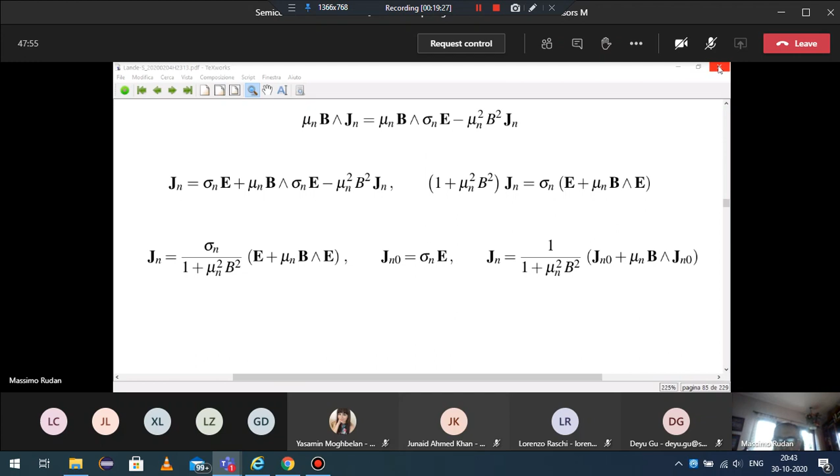Okay, and this one is connected to the other one that I was trying to show you before. So I just destroy completely this. Let me see whether I can put the other one over the screen. No way. It's nothing to do with. I don't know what happens. I'm going to destroy all the other.

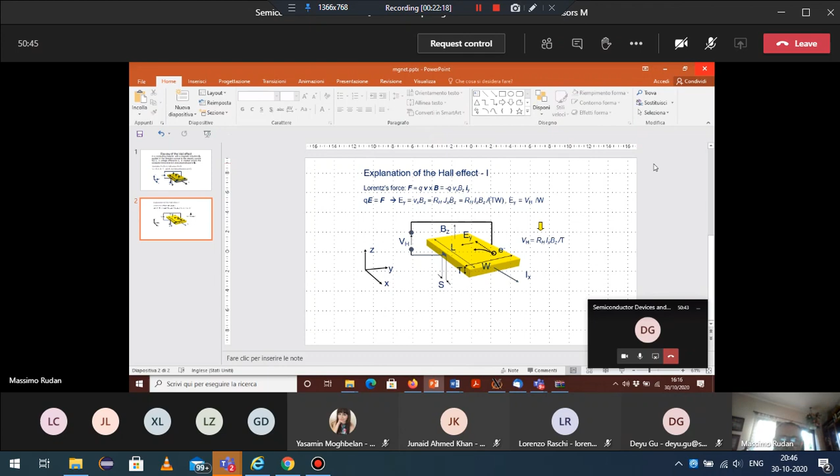Can some of you operate the mic and tell me what you see on the screen, please? Because I'm not able to. Hello? Can you see the slide? Yes or no? Yes, we can see. Oh, you see. Okay, good. Sorry, because there was some confusion in the system. Okay, so now I'm trying to change the slide, taking another file. Okay, so now.

Okay, you should be able to see a calculation that is similar to the calculation that I just completed a few minutes ago, just the same thing. This slide is still related to the Hall effect. So the Hall effect was examined yesterday, but I come back to it for a second because I just wanted to remind you that when we use the magnetic field as a method to measure properties using the Hall effect, the device must be elongated.

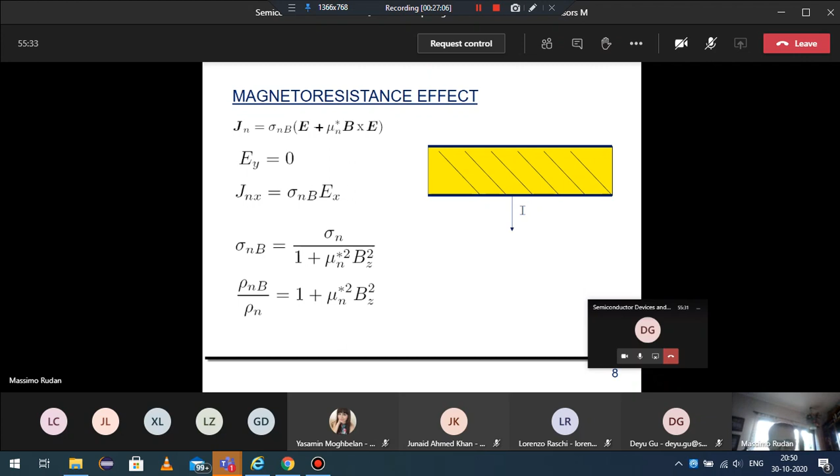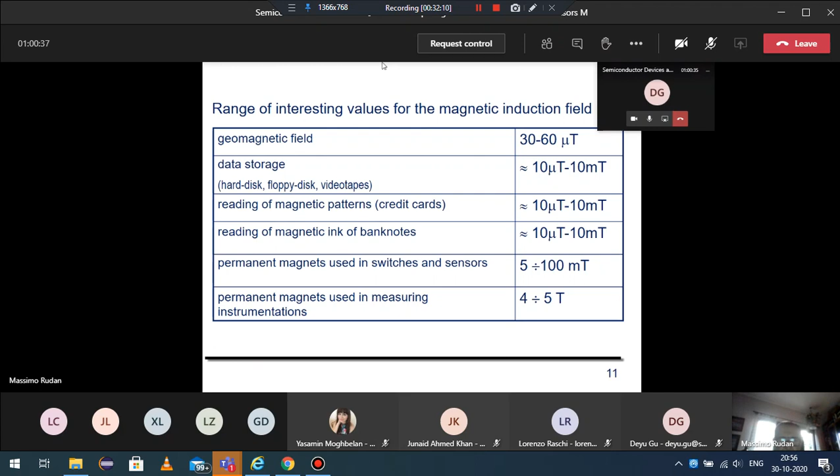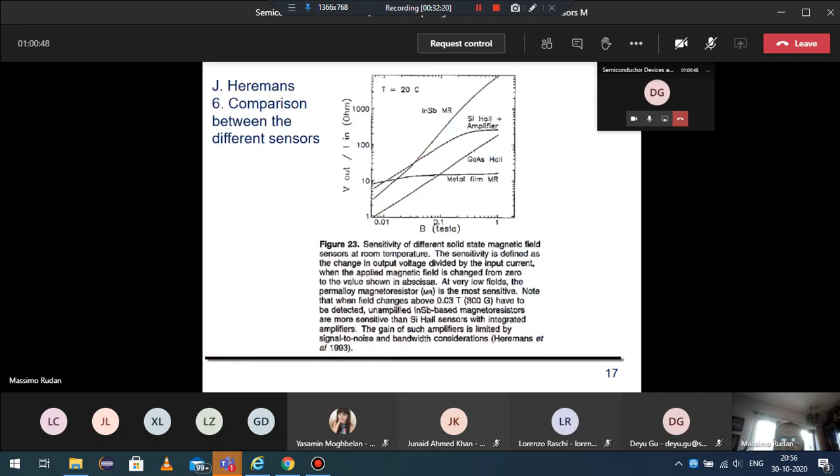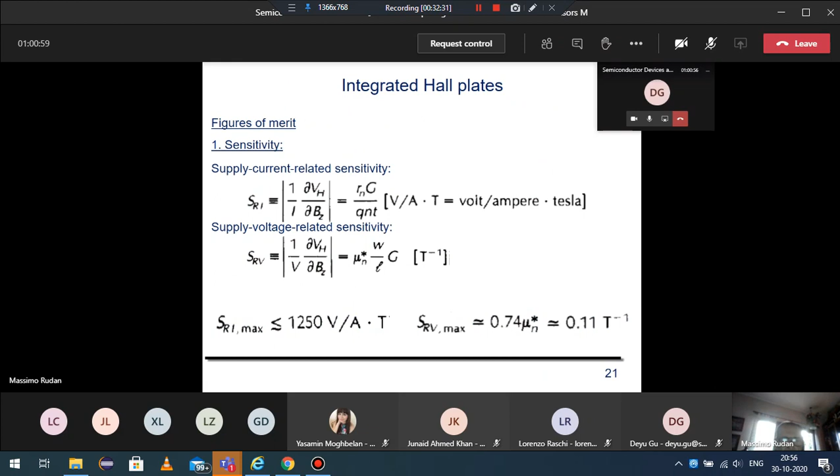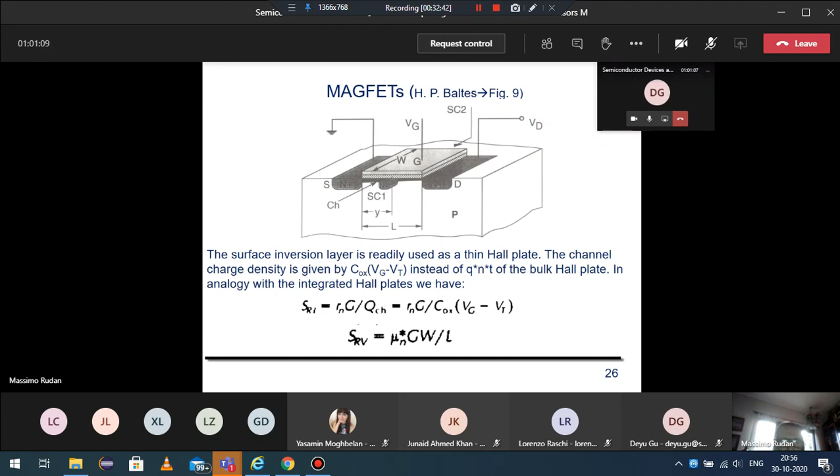Okay, we are now going into too many details. These are typical forms of devices that are used for detection of magnetic fields. I will upload much of this material, so if any of you is interested, you can have a look at it. But I think that this is it for the magnetic sensors.

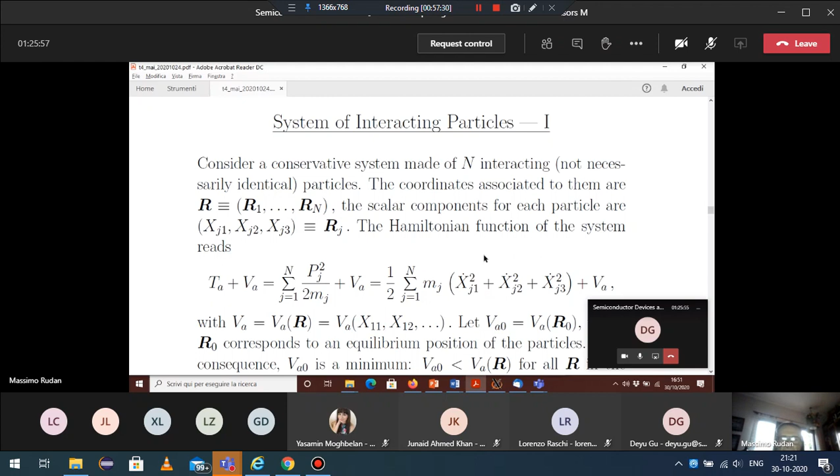You remember that in mechanics, for a system of particles, we define the equilibrium positions as the positions that make the potential energy minimum. So in principle, we should take the potential energy that depends on all coordinates and calculate the coordinates such that Va is at a minimum. It is enough for us to know that this minimum does exist.

So the set of coordinates such that the potential energy has a minimum is called R0. R0 is the equilibrium point of the system. This does not mean that the particles sit in the equilibrium point. Okay, they vibrate around it. And we also call the value of the potential energy corresponding to the minimum VA0. Okay.

Now, as I said before, the displacement of the particles with respect to the minimum is small. And this is very helpful because we can think of expanding the potential energy of the whole system in a Taylor series around the minimum. And then we truncate the expansion to second order. Okay.

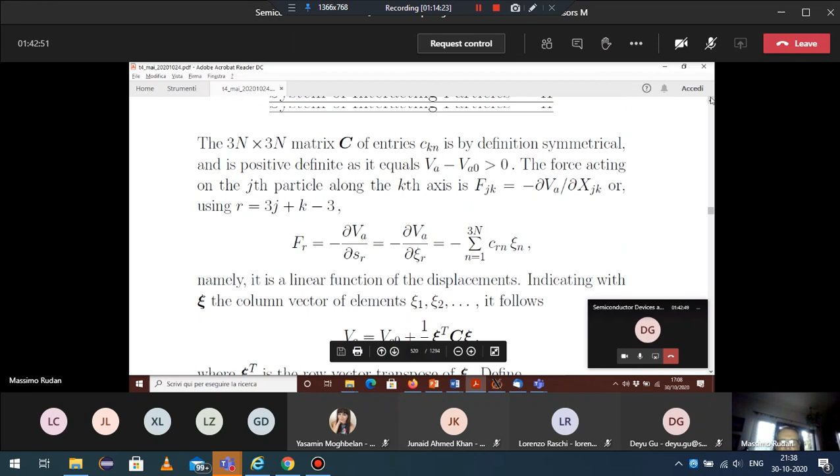To do so, it is better to introduce a matrix and vector notation. So we call this one, with symbol capital C, the elastic matrix, okay? So this is a gigantic matrix of order 3n by 3n.

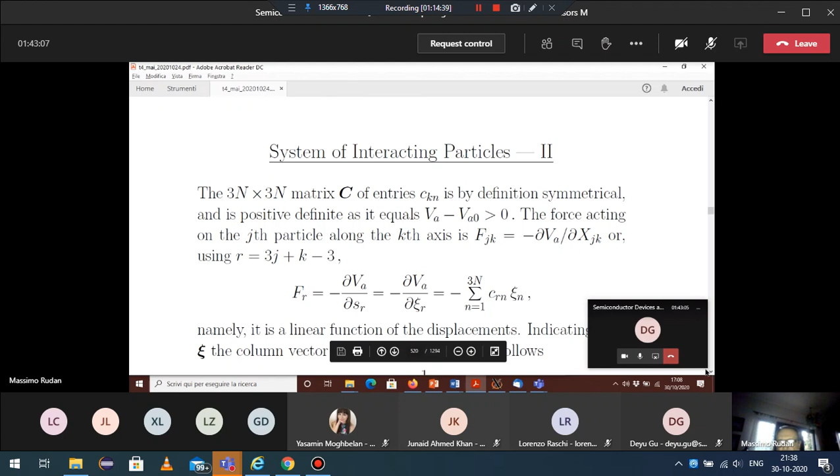And then we also introduce a column vector whose elements are the displacements, okay? So if we want to express the potential energy after the expansion to the second order in vector form, we may do this. We may write the second order expansion as the vector of the displacement that is pre-multiplied by the matrix. So C times xi is again a column vector, okay? And then we multiply by the transpose of xi, okay? If you do that, you find exactly the second order expression, the quadratic expression that we had before.

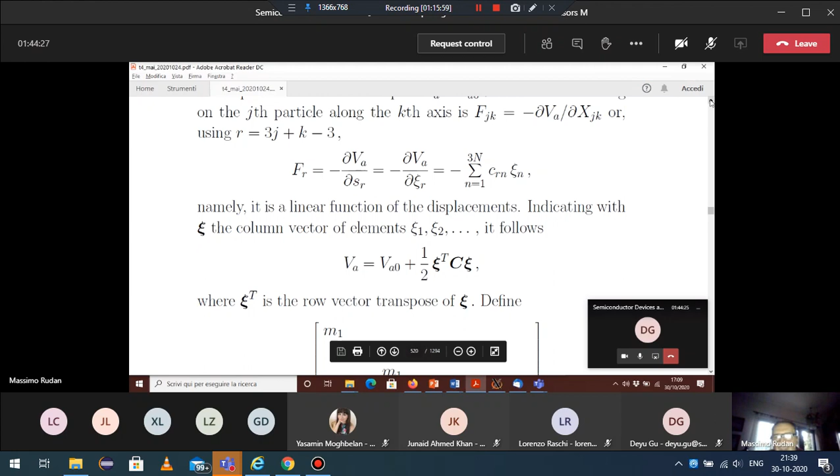Now what we want to do to continue is to express also the kinetic part of the energy in vector form. This is relatively easy because you see in the kinetic part, we have an expression that is already separated, and we have the masses as coefficients. So what we can do is, first of all, in a conservative problem and in Cartesian coordinates, capital P, that is the momentum of the particle, is equal to the mass times the velocity. So the kinetic energy can be written as, you see in the next of this formula here, P becomes m times the velocity. So we have the mass squared divided by the mass, that gives you this, times the square of the velocity, and the velocity of the individual particle is just the sum of the derivatives with respect to time of the three components squared.

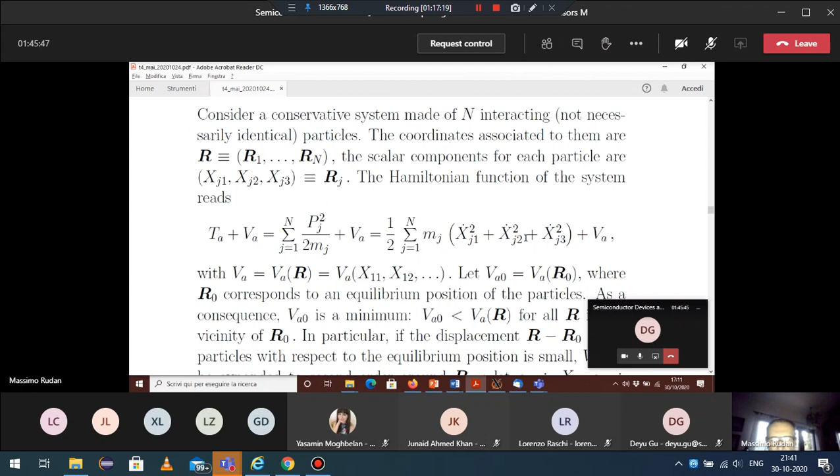Okay, so this expression can immediately be set up in matrix form. Of course, we have to introduce the new components that we call xi. Okay, so x dot becomes xi dot. Then we introduce the matrix whose elements over the diagonal are the masses of the particles. Okay, so you remember the first three components are related to particle 1 and axis 1, 2, and 3. So of course the mass is the same. So we have M1 3 times. Then we continue along the diagonal and we end up with Mn 3 times, and all the remaining entries of this matrix are 0. So this is the mass matrix that is a diagonal matrix.

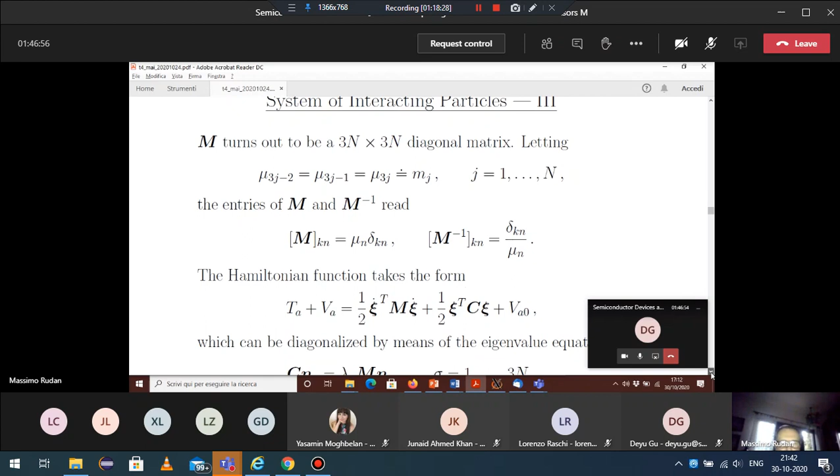So in summary, the total energy takes the form that you can see here, 1/2 xi dot transpose times M times xi dot plus 1/2 xi transpose times C, that is the elastic matrix, times xi, and then we have the minimum of the potential energy that is simply an additive constant. Okay? Now, the mathematical problem is this. Apart from the constant at the right-hand side, the total energy is the sum of two quadratic forms. One quadratic form is the kinetic part of the total energy, and this quadratic form is already diagonal because matrix M is diagonal. On the other hand, the quadratic form associated to the potential energy is not separated, is not diagonal, because the elastic matrix C is actually full. Okay?

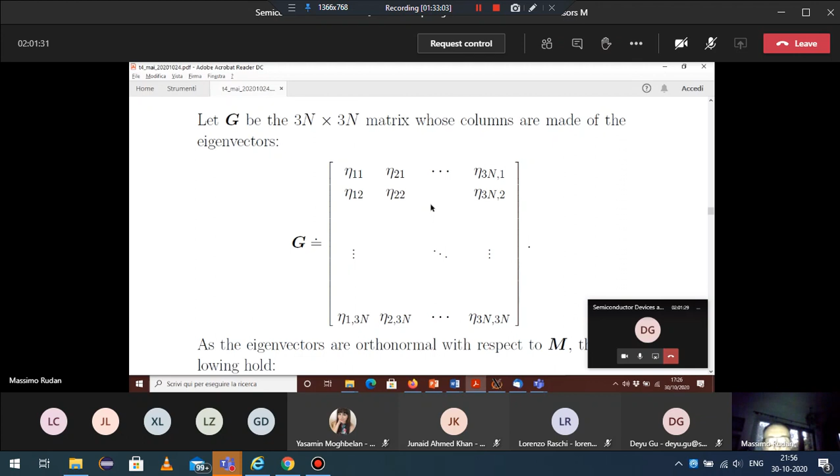And if the matrix is non-singular, there is the inverse. The inverse of G does exist. Okay? So, given that, we can rewrite the condition of orthogonality, this one, in matrix form, because we can write this expression using sigma equal to 1 and tau equal to 1. Then we rewrite it for another pair of indices, and so on and so on. And we put all these

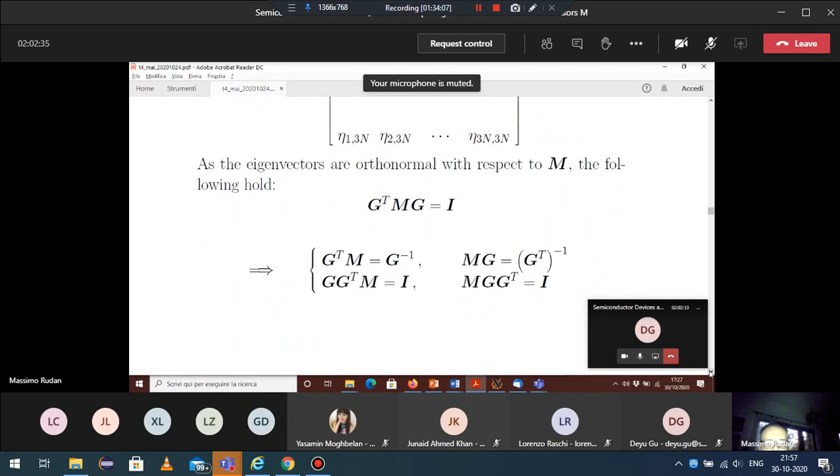expressions together. Okay, you remember eta is one of the possible columns of the big matrix G, and same for the other eta here. So this condition of orthogonality with respect to M can be written in matrix form like here. Okay, it is the transpose of G, GT times M times G is equal to I. I is the identity matrix. It is the matrix in which the diagonal is made of ones, and all the remaining part of the matrix is made of zeros.

Okay, so this is the fundamental relation that allows us to diagonalize the total energy of the system of particles. We have 2 minutes before the intermission. With this expression we can deduce other useful expressions. For instance, consider the original equality and multiply to the right both sides by the inverse of G. So I times the inverse of G, of course, gives you the inverse of G, because this is the identity. Here you have G times the inverse of G, that gives you the identity that is not written.

Okay, so this expression here is obtained immediately by multiplying to the right the original expression by the inverse of G. Then you take the result here and multiply the result to the left by G. So GTM, putting a G on the left, gives you GGTM. G times the inverse gives you the identity.

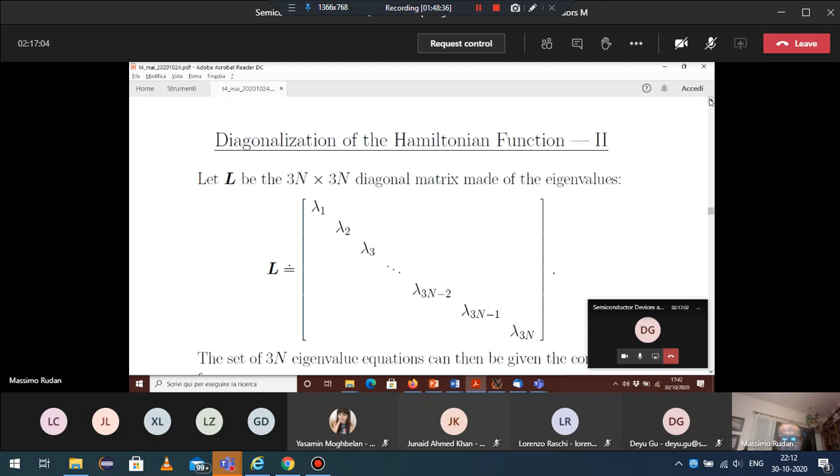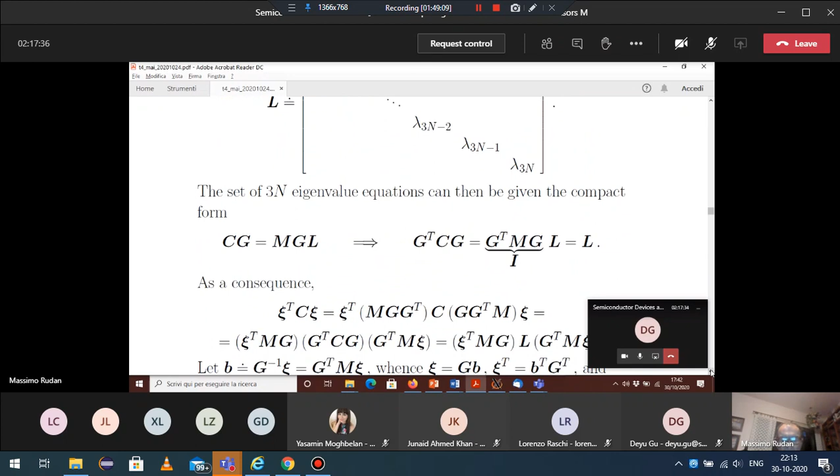So after defining the matrix of the eigenvalues, we can write the original eigenvalue equation, sorry, in another form. Instead of eta, we place G here and there. And instead of lambda, we use the matrix of the eigenvalues. So we simply obtain a more general form of the same equation. So the eigenvalue equation in full matrix form is this. Instead of eta, we have the set of all etas. Same here, and instead of the eigenvalues, we have the matrix of the eigenvalues.

Then we start by multiplying to the left the eigenvalue equation by the transpose of G. Okay? When we do so, at the right-hand side, we have GTMG that, because of one of the other relations that we found before, is the identity. So by this manipulation, we have found that GT C G is equal to L, is diagonal. And now we start doing the operations that I anticipated.

Assume that between the transpose of xi and C, we insert the identity that, of course, changes nothing, okay? And then we replace the identity with MGGT, because from the previous page, we remember that MGGT is identity, okay?

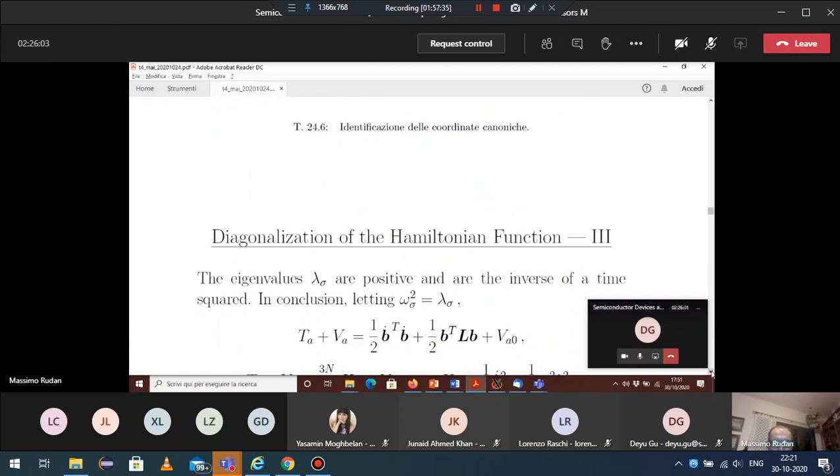So the new variables are the quantities that form the vector B. And they are related to the actual displacements by this definition here, or this definition here. So if we succeed in calculating B, then by simply multiplying by G, we obtain the actual displacements of the atoms. Okay, so the issue is to calculate B, each component of vector B.

So in the new variables, we find that the kinetic energy is 1/2 B dot transpose B dot, that is diagonal. The potential energy is 1/2 B transpose LB plus the constant. Okay. Before we continue, we ask ourselves, what are the units of L? L is a matrix whose diagonal is made of the eigenvalues.

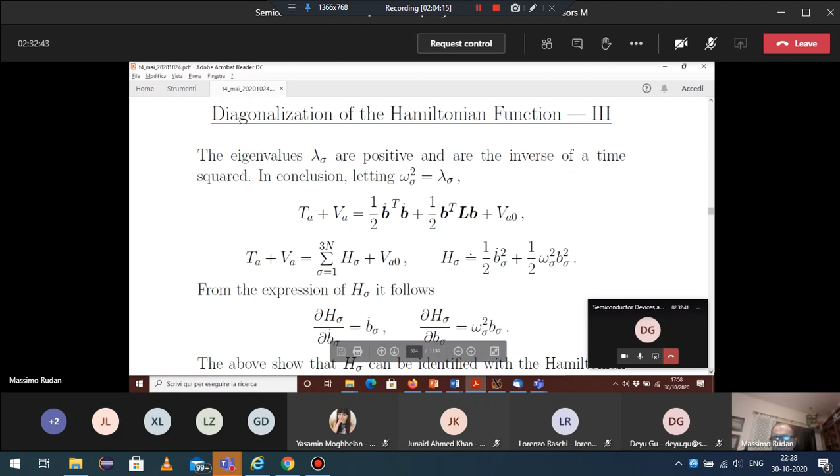That means that since the total energy of the atoms is conserved, because the system is conservative, also the individual degrees of freedom are conservative. That means that the individual energy associated to index sigma is some constant. And the total energy of the system is the sum of all these constants plus the minimum VA0 of the potential energy.

If one solves the system, I don't know how much you remember of Hamiltonian mechanics, but if you consider the total energy here as the Hamiltonian function of the individual degree of freedom, you will remember that the derivative of the Hamiltonian with respect to the coordinate is minus the derivative of momentum, that is minus the force. And the derivative of the Hamiltonian with respect to the momentum is equal to the velocity of the degree of freedom, okay?

So if you combine these notions that are elementary Hamiltonian mechanics, you eventually find that the equation fulfilled by the individual degree of freedom B is of this type: the second derivative of B equal to minus a positive constant times B itself. So you remember very well that this is the equation of the so-called linear harmonic oscillator. The solution of this differential equation is some constant times the cosine of omega t plus a phase, okay?

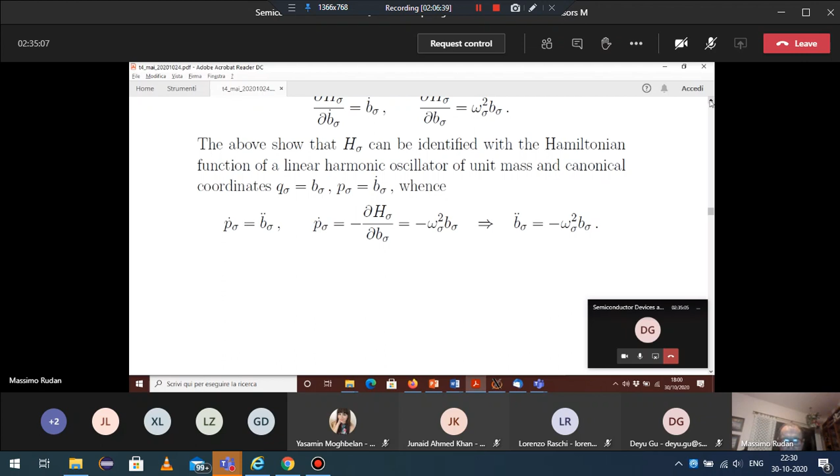So the individual degree of freedom B, after the separation of the variables, behaves like a linear harmonic oscillator. This does not mean that the atoms are linear harmonic oscillators. This means that after solving this in these new variables, one has to go back and find the displacements xi by multiplying the individual degrees of freedom by matrix G.

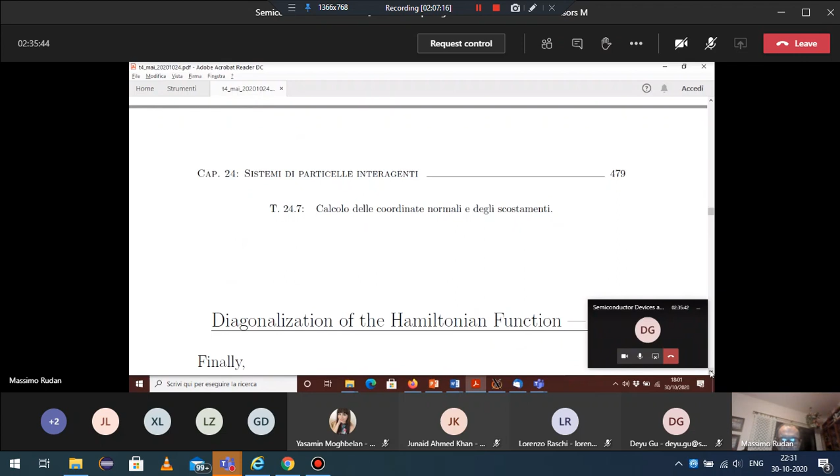So eventually, the actual displacements of the atoms are a complicated combination of linear harmonic oscillators, okay? Only in the separated coordinates, each degree of freedom acts as a single linear harmonic oscillator. Conclusion: each B behaves in time like this. It may be convenient to use the complex notation, so instead of the cosine, using complex exponentials. Omega sigma, of course, is the angular frequency of the oscillations.

And the quantities that we have just found, that is B of sigma, as you may well remember, are called the normal coordinates of the system, or also the principal coordinates of the system. Also, the oscillation of the normal coordinate of index sigma is called the mode of the vibrating system. So you may think of this set of many, many atoms that vibrate around the equilibrium positions, and we have just decomposed the motions of the atoms that are very complex in a superposition of oscillatory motions that are called modes or vibrational modes of the materials.

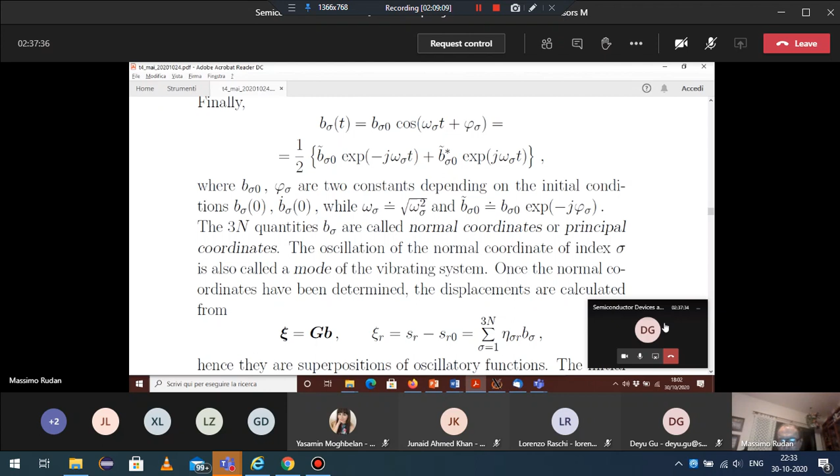Okay. As I said before, after calculating the B quantities, one calculates the actual displacements, and from them you may also calculate the actual positions S of the atoms.

Obviously, in order to fully calculate these quantities, since we started from a differential equation of the second order with respect to time, it is necessary that we know the initial position and the initial velocity of each degree of freedom of the system, which is, of course, something that in practice is impossible, not only because of the numbers, but also because of quantum mechanics that forbids this.

Okay, but in any case, this description is very, very useful for several reasons. One reason is that after the calculation that we have done is completed, and you remember this calculation has been done fully in the classical mechanics environment, okay? We never introduced any quantum mechanics. But when we have reached this point, it is relatively easy. We are not doing it now, okay? It is relatively easy to quantize the system, because the quantization of the linear harmonic oscillator is a very well-known problem of quantum mechanics, okay? So we simply go from classical to quantum in one step, if we wish.

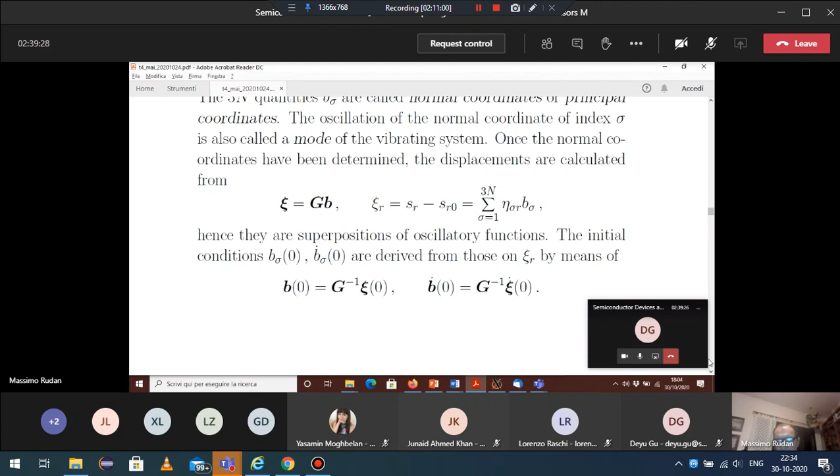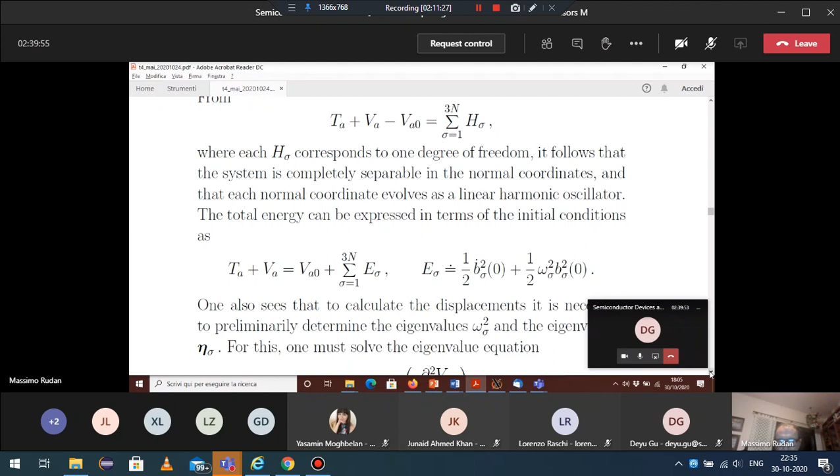This is something that we already mentioned. The total energy less the value at the minimum is separable. The total energy is conserved because each degree of freedom in the normal coordinates keeps the energy. Where is the real difficulty of the problem? The real difficulty is to solve the eigenvalue equation. That is, to solve the equation that is here in the bottom line of the page, okay? We did not solve it. We said somebody has solved the equation for us and found the set of eigenvalues and eigenvectors, okay?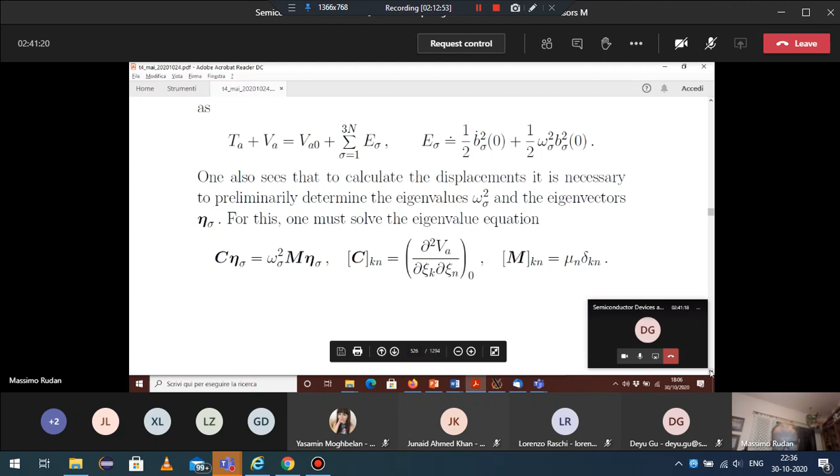The problem is really complicated if we have a general system made of many, many atoms, okay? Instead, the problem becomes considerably easier if we deal with a periodic structure. So for the periodic structure, and the crystals are periodic, we have the possibility to continue the analysis. Of course, today it is very late, so we shall do very little, but let me proceed in order just to introduce what comes next. We neglect this part because it is quantum.

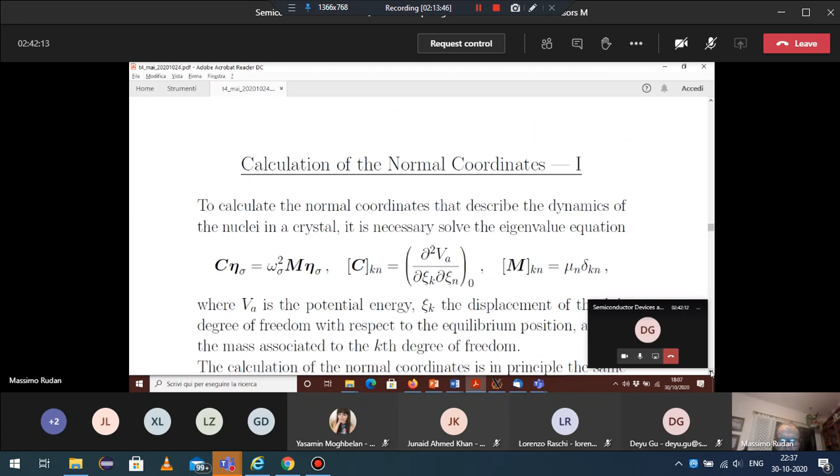Okay, so we are here, and this replicates exactly the line that was visible in the other page. We have an eigenvalue problem to solve. The matrix C is the elastic matrix, made of the second derivatives of the potential energy with respect to the coordinates, calculated at the equilibrium point. And the matrix M is the matrix of the masses, a diagonal matrix in which the masses are indicated with the symbol mu. Mu of k is the mass associated to the kth degree of freedom.

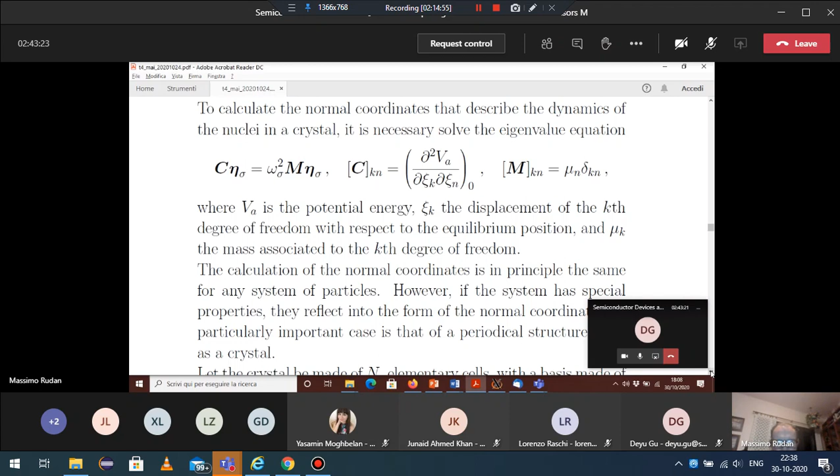Okay. Now we assume that the system that we are considering is a crystal, that is a periodic structure. You remember that we introduced some concepts in the crystal. We introduced, for instance, the concept of elementary cell. And we said a crystal is made of a number of elementary cells of the direct lattice. The cells are equal to each other. They cover completely the crystal, and assume that the number of cells is some NC.

You also remember that we have called basis a group of atoms that replicates itself periodically. So inside of one elementary cell, we have either one atom or a group of atoms that constitutes the basis. So assume that the basis is made of a number of nuclei that is NB. This number NB is small, like 2 or 3. It's not a very big number, okay?

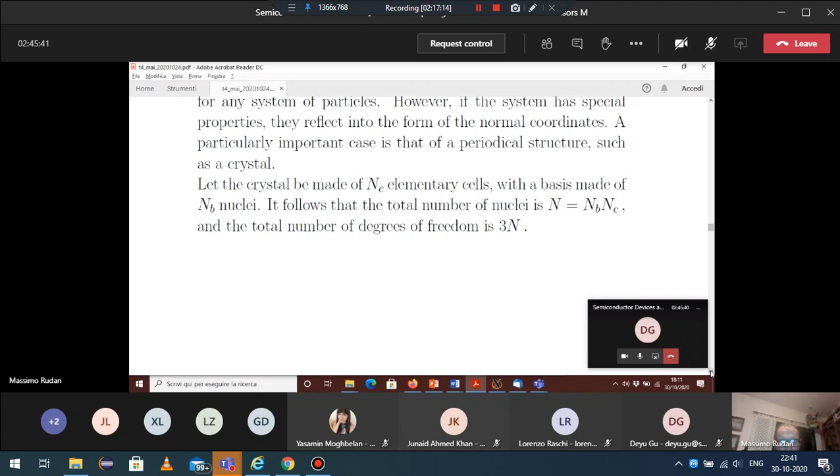Now there is a technical difficulty. To proceed, we must be able to identify each individual cell of the crystal. Then, inside each individual cell, we must be able to identify the different atoms that form the basis.

And for each atom of the basis, we must be able to identify the equilibrium position and the displacement. Okay, so the technical difficulty is that now we have to quit the very convenient method of having one index. You remember we numbered all the degrees of freedom with one index. We cannot do it anymore. We must distinguish indices for the cells, indices for the equilibrium position of the atoms inside the cells, and indices for the displacements. So the notation will become much worse for a while, but eventually we shall slowly recover an easier notation.

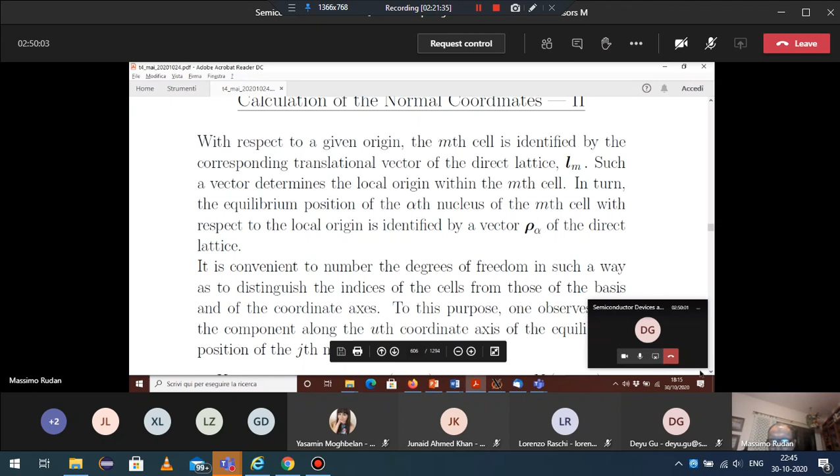And finally, we must distinguish the components along each coordinate axis, 1, 2, or 3. So in conclusion, we must use for a while 3 indices. One index is m; it goes from 1 to NC. The second index is alpha; it goes from 1 to NB. And the third index is u; it is either 1, 2, or 3. So a displacement, instead of being indicated with xi q, with only one index, would be indicated as xi m alpha u. That is the displacement along axis u of atom alpha of cell m. And if we have two of them, we need two sets of indices, because you remember we have quadratic expressions with xi q and xi r, for instance.

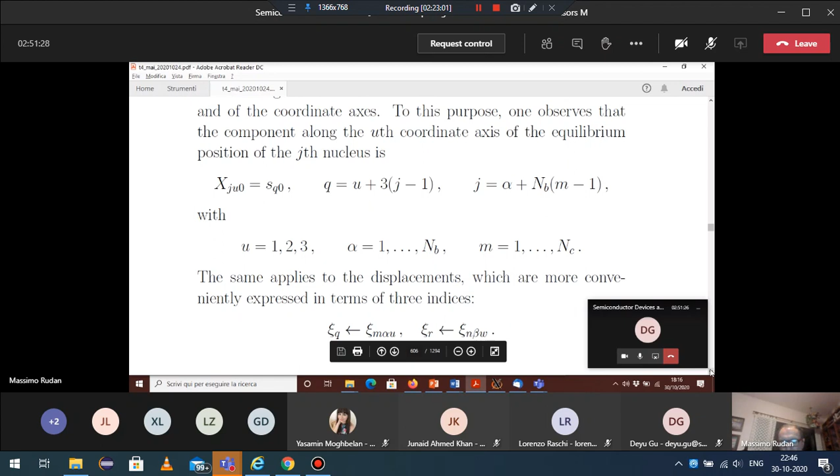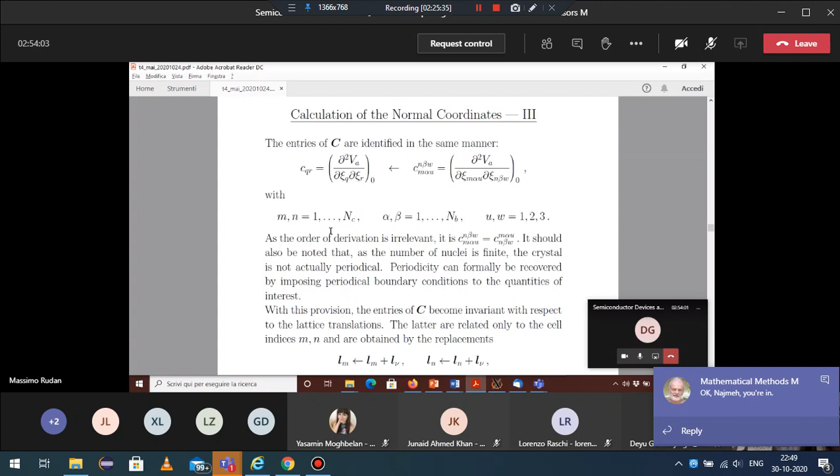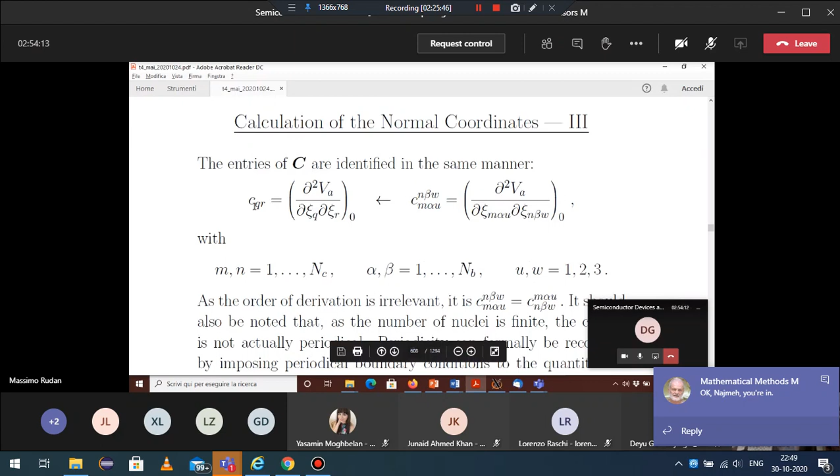How does the notation change because of these many indices? The elastic matrix has two indices, so they must become 6. So we place them, 3 of them on the bottom and 3 of them on top. And the meaning is, as you can see on the right, this one. So one of the xi provides the indices on the bottom and the other the indices on top. Obviously, since the elastic matrix is symmetric, we can swap the indices. So if we rigidly take the lower indices and put them on top, and then take the upper indices and put them to the bottom, it is the same.

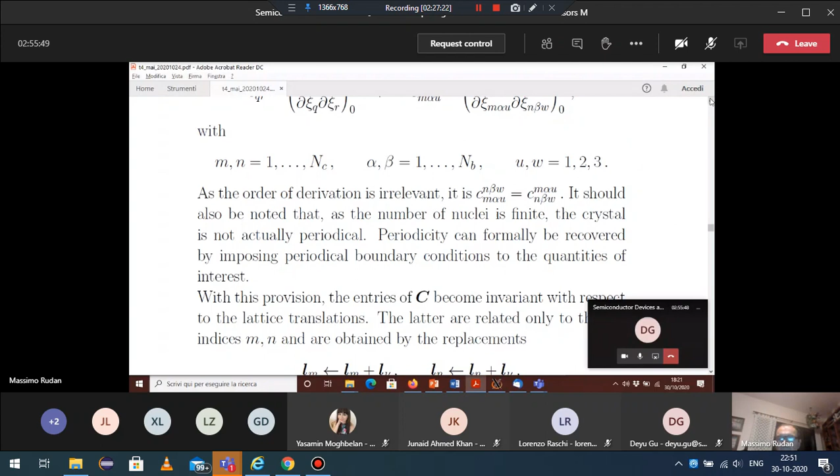Then we remember that as long as the crystal is infinite, the crystal is periodic. In principle, a finite crystal is not periodic, but we can recover the periodicity with the trick of imposing the periodic boundary conditions. So again, we can think that the lattice is periodic. This is a very important point, because if the crystal is periodic, we can demonstrate the first property of the entries of the elastic matrix. These entries are invariant under translation. That means that if we move from one cell to another, this will not introduce variations in the components of the elastic matrix. Why? Well, assume that we impose a translation to the indices, so that the translational vector that identifies this cell m is replaced with Lm plus L nu, with any translation nu.

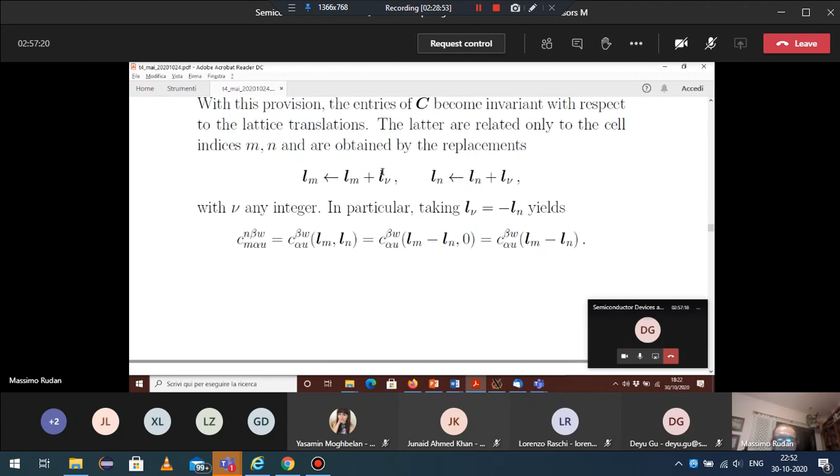And the same another index, Ln, is given the same translation, okay? What does it mean? It means that you see in the elastic matrix, we have at the same time M and N, okay? So we shift at the same time by the same vector the positions of the cell without changing the other indices, beta, alpha, W, and U, okay?

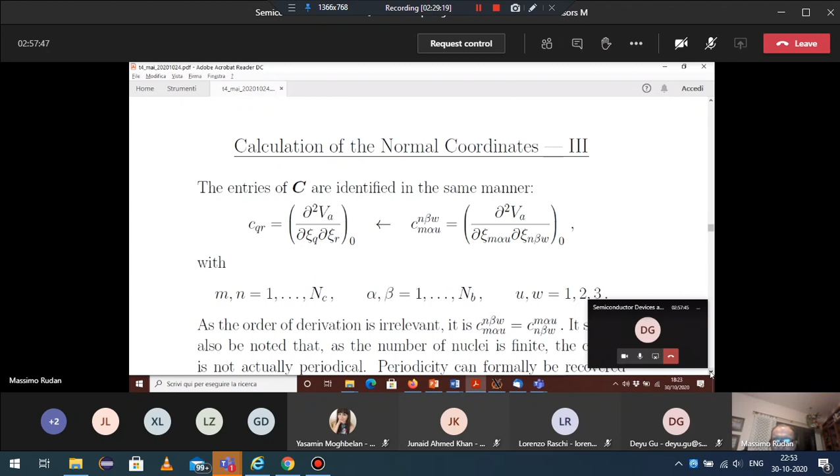Then we take a special form of the translation. We take the negative translation of Ln, okay? That means that Ln becomes 0. Lm becomes, as you can see here, Lm minus Ln, okay?

So the conclusion is that physically, we can state that, you remember the meaning of the elastic coefficients is that they define the force that applies on some degree of freedom of the crystal, okay? If you consider C of M and N, you are considering the force that applies on an atom placed in cell number M due to the action of another atom that belongs to cell number N, okay?

Now, it is intuitive that this action must depend only on the relative positions of the two cells, not on their absolute positions, okay? Because the force that is acting between two atoms cannot depend on the choice of the origin of the reference, and inserting a translation is like shifting the reference, okay? So the force depends only on the relative distance, not on the absolute position of the atoms, okay?

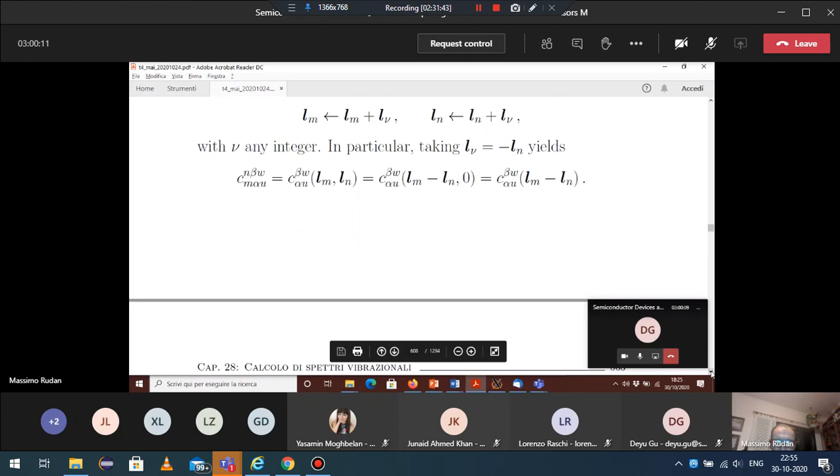So we can conclude that as far as the indices of the cells are concerned, the elements of the elastic matrix depend only on the distance between the two cells involved, not on the absolute positions. Now, of course, we consider that all the other indices are fixed. That is alpha and beta, that are the pointers to the atoms with respect to the local reference, and the U and W indices that are related to the coordinate axis, okay?

Now, if you now consider again the indices m and n, what are the possible distinct differences between them? Well, one is 0. M minus n can be 0 if they are taken equal. Then you have m minus n equal to 1. M minus n equal to nc minus 1. Okay? But if you continue, you see that all possible combinations of distances of the indices m and n can only give you these possibilities that are indicated in this line.

That is, the number of possible distinct entries of C related to the indices m and n are only nc. The total number of distinct entries of C with respect to these indices is nc, not nc squared, as one would expect, because we have a matrix of this form. Okay? Why? Because if you try to consider all other possible distances between the nodes, you find immediately that due to the periodicity of the crystals, all the other possible distances replicate themselves. Okay? So you must appreciate this, because we are reducing enormously the number of degrees of freedom of the system due to the periodicity.

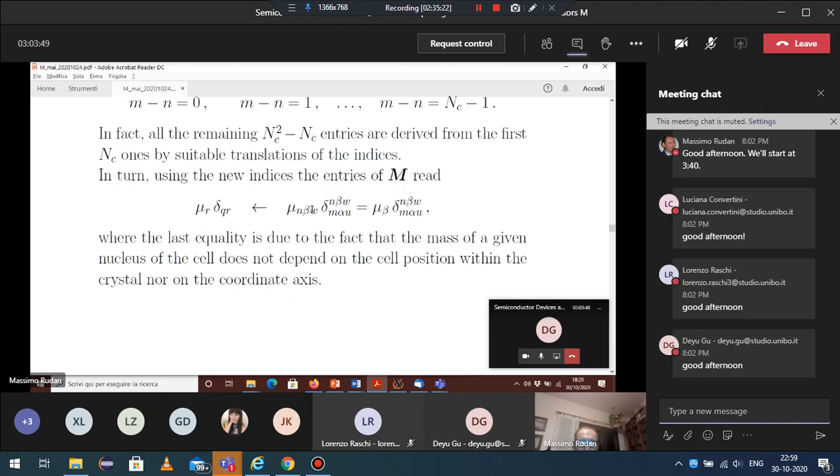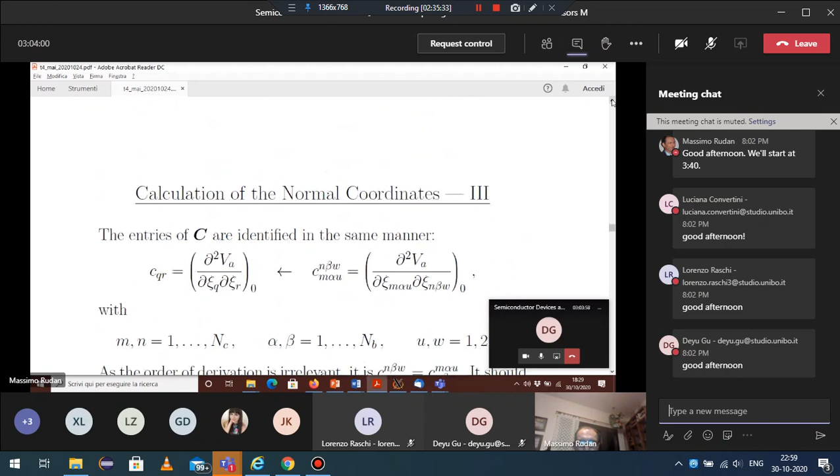Another issue that is also obvious is that the mass of an atom of the base cannot depend on the index of the cell, okay? If at each position in the cell we have the same atom because they are periodically replicating themselves, the masses are the same. And of course, the masses cannot depend on the coordinate axis either, okay? So we can also simplify the mass matrix, because in principle, the mass matrix has all these indices, okay? But obviously, mass cannot depend on the cell, so we drop index n, and we also drop the index of the axis, okay? The mass can only depend on the index of the vector of the local reference, so it can only depend on beta.

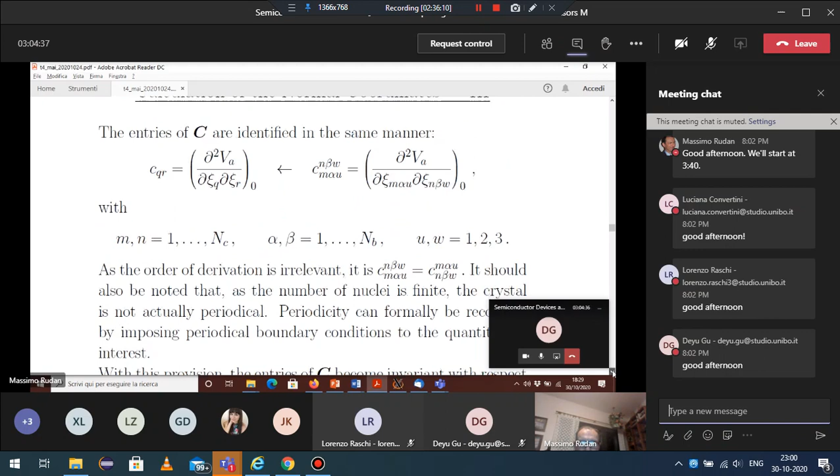So if this atom is different from this atom and different from this atom, the three masses are different. But this atom here is equal to this, and to this, and to this, and so on. So it does not depend on the index of the cell, and of course it does not depend on the index of the axis. Okay, so we now finish, but the message is periodicity will decrease enormously the number of degrees of freedom of the system, to the point that it actually becomes solvable in a relatively easy way.